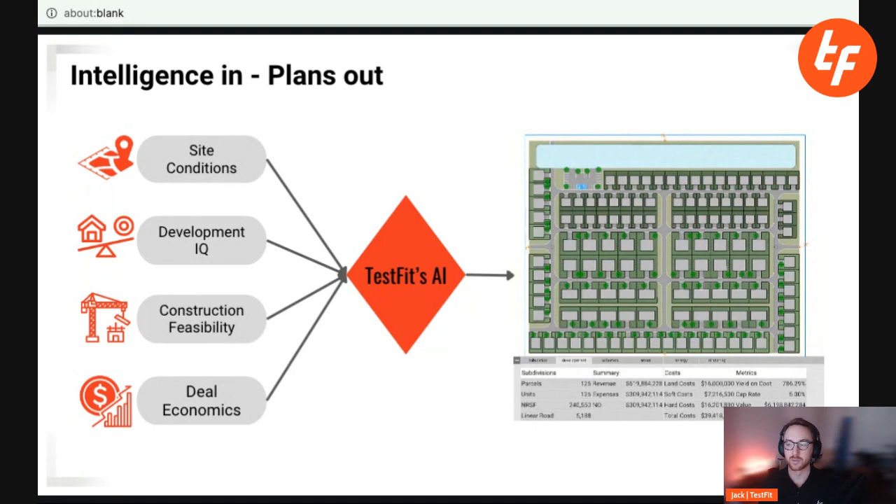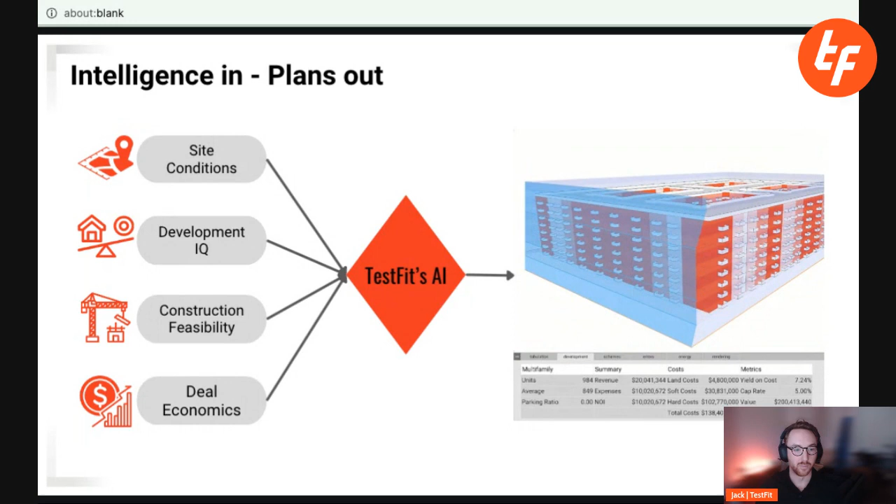So for those of you that are maybe new to TestFit and this is your first time hopping in, welcome. TestFit really is working on the idea of bringing a lot of intelligence into our AI and spitting out plans for you. Whether that's site conditions that we bring in or you bring in by bringing in a background, a development IQ that's built into our algorithms, as well as your understanding of both construction feasibility and what needs to be developed, and then deal economics as well. So all of that combined in TestFit gives you that real-time AI approach to make informed decisions as you're changing a site plan and doing a feasibility study.

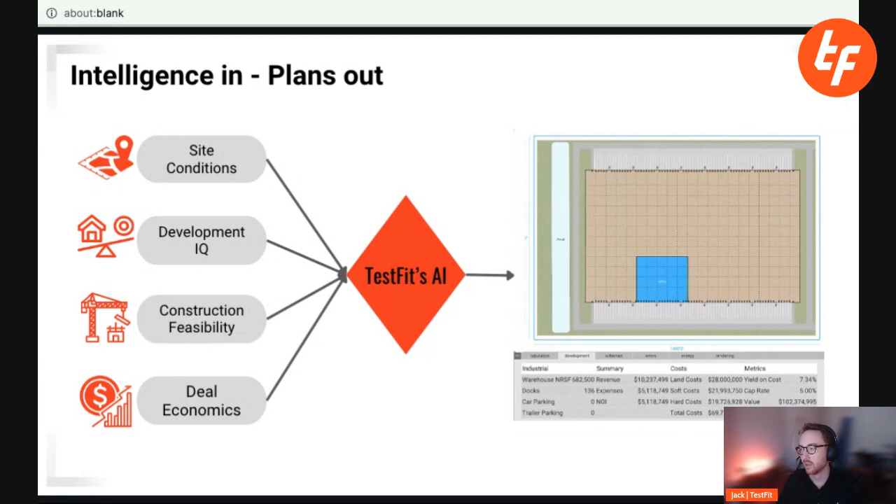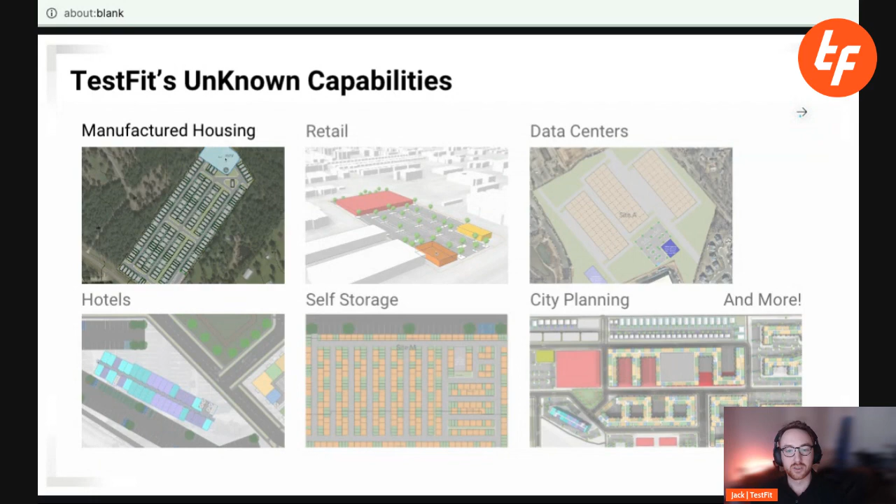Very exciting stuff. But today, manufactured housing, very excited about that, which you can see right there. There's a few assumptions that we're going to build into TestFit's solve today. So always good to have base level conditions, right? We're not working on a gray box, we're not just playing in a playground. So we're going to have site constraints. We've already picked a site, and I'll show you where that is.

A slight grade, we're going to ask TestFit to solve for 5% on-site drainage, 5% of the total area, a 2,000 square foot amenity building, along with 40 parking stalls for both the amenity building and the community.

Lot sizes - there's a lot of ways that we can do this in TestFit. We're going to walk through most of them today. If you have questions as I'm going, feel free to hop in. If you have critiques, also love those as well.

What we're going to work on today is a mix of 3 different types of lots: one to accommodate a single section module, a double section, and a triple, with those dimensions on there - about 75 feet in depth for all of them, and then ranging width.

And then we can adjust the mix that we're looking for too - building sizes that go on each of those. So that single is going to be a 15 by 60, so 900 square foot unit. We're going to look at a 25 by 60 for 1,500 square feet, and a big boy for 40 by 60 at 2,400 square feet.

I'm going to show you there's a couple ways even to solve for the building sizes as well within the lot size. So really fun maneuverable pieces for us to play with today.

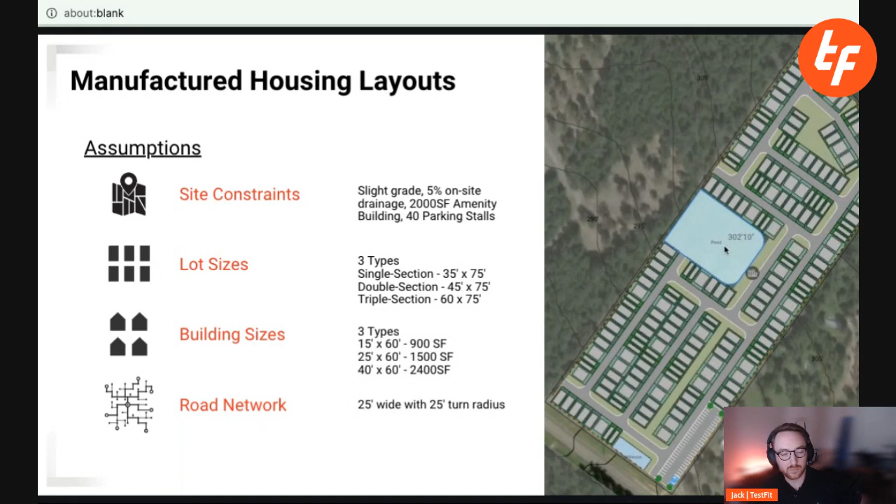So let me go ahead and stop my screen real quick, and I'm just going to switch right over to TestFit.

So for those that are unfamiliar, TestFit is a desktop software, but we're really quick. So everything that you're going to see today is live, not pre-recorded. You're going to see my hands actually moving the software. But we're able to solve really quickly because our engineers are brilliant, and we're able to build a very lightweight software that can integrate a lot of different solution-focused algorithms within it. So let me go ahead and share my screen there.

So what we're going to do here is we already picked a site. So I've already kind of jumped in here. We actually used a recently sold site thanks to some data providers. So we're going to solve this for whoever that owner is - don't know who that is.

What we are able to do within TestFit is put in an exact location, which I did. We can put in an address, you can put it in general location, right? We've got a satellite background, and we can also switch that between road view as well. And then we can add some other data layers to this.

So we can look at US parcel maps, we can bring in elevation data, so you can start to see your contour lines and adjust the increment that you see those at. I think we limit it to 2 feet up to 10. And like I said, this does translate to metric when we do switch into that, but we're working in imperial today.

And so what we're going to do is go ahead and hit this blue flashing button, and that's going to allow us to select a site. We're going to go ahead and add it. You can draw in the site if you want to, trace the lines here, trace in a background image if you want to, or type in metes and bounds if you'd really like.

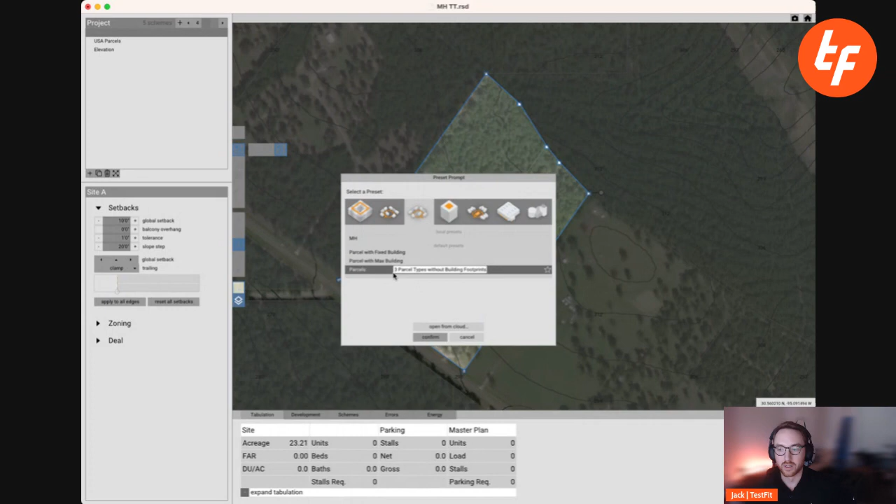And we're actually going to start from scratch. I'm not even going to show anything pre-baked for you guys today. We're just going to start from scratch and show you the full workflow, going ahead and selecting basic parcels.

Sweet, and that's it. But it is really that fast. So we're able to see different parcel sizes already coming in here pre-baked with TestFit. And this is what we call a preset, which basically has a bunch of parameters already saved with it.

TestFit comes pre-shipped with those presets that you just saw, but you can also create your own, so you don't have to use ours. And then it's really that fast to just click and go into your next site and then make tweaks as needed on a site basis.

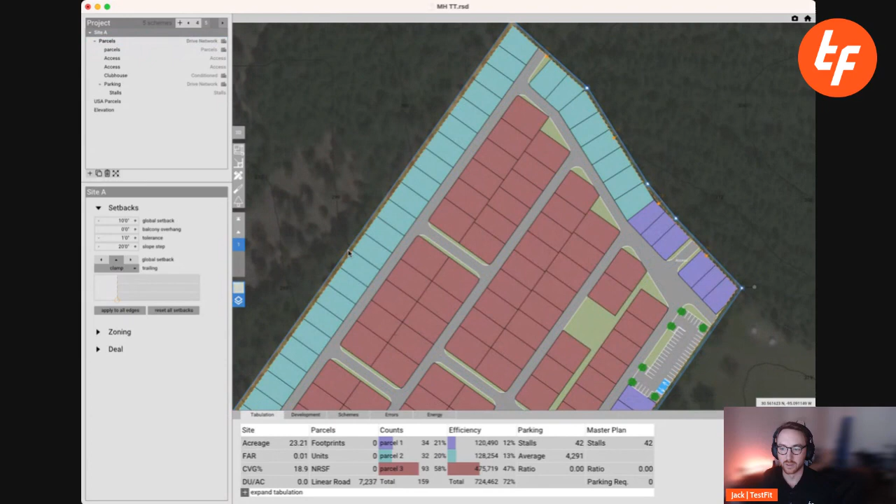We can also come in and actually adjust setbacks too if we wanted to. Really simple in here, just kind of messing around with those. And you can also type in that setback that you want as well.

So all right, the first thing that we want to do is we're actually going to start adjusting the parcels, right? The road network is solving with those parcels in mind, keeping in mind the depth that they're all working with. So up here in our nav tree, we're actually just going to jump to parcels.

So there's a few different tabs in here. We're looking at none right now for our footprint. We're actually just purely looking at the lot size, and that's going to be perfect for us to get started.

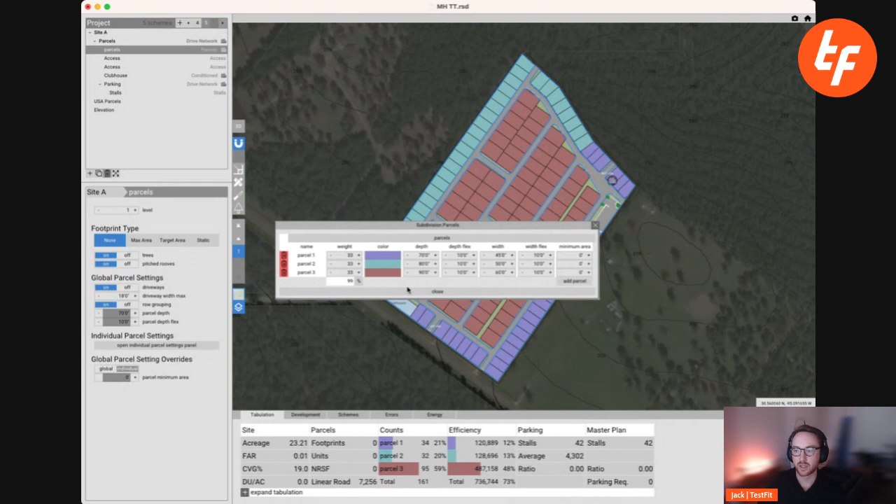After that, let me grab my notes real quick. We're going to look at this individual parcel settings panel. Basically, think about this as your kit of parts approach or your suite of lots that you want to have, and we're going to be able to make adjustments to all of them.

First thing I'm going to do is actually change my colors to a little bit of some pre-baked ones. So I know I wasn't going to do full pre-baked, but we're going to do a couple, just because I like the greens and it makes the plan look a little bit nicer. Great, awesome, so now we've got a few in here.

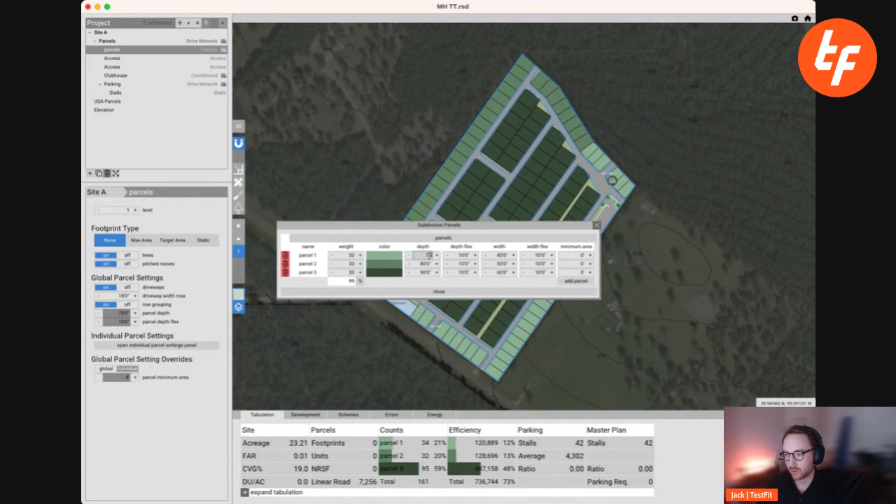We can adjust our weight, and then what we're going to do is adjust our depth and width. So all of these guys are going to be 75 feet in depth. Makes that super simple. And then our widths are going to vary from 35 feet, and call me out if I did this wrong, but I think my notes are correct, 45 feet, and then 60 feet.

And then we have a depth and width flex. We're actually going to leave that just for now, and I'll show you the implication of that in a second. And then we can adjust the weight. Think of the weight as that unit mix, the weight of the percentage of all of your planned units.

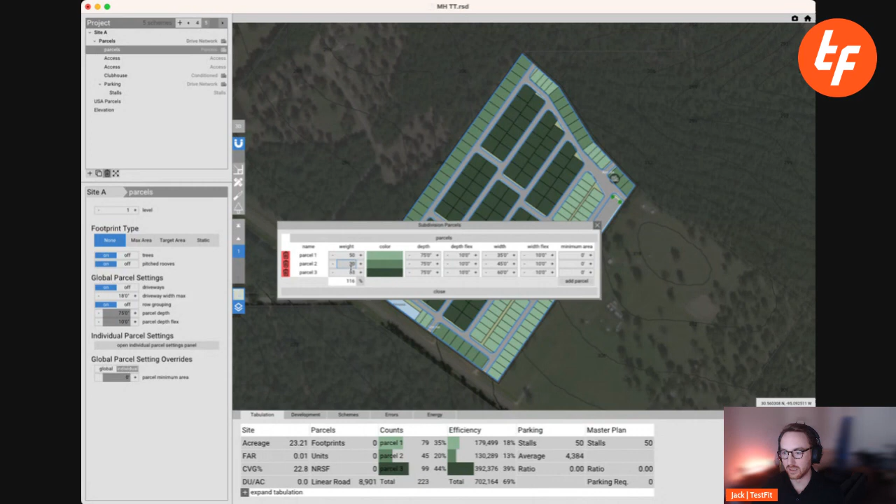So I actually want most of them to be that smaller size. We're going to do maybe 50% these and 20% of the larger ones. So you just saw that implication change in real time. We actually just completely revamped the entire plan, got rid of most of the big ones, and instead put in some of the smaller ones.

Any questions so far? I know this is a lot really quickly, so I just want to make sure we're keeping it open to everyone.

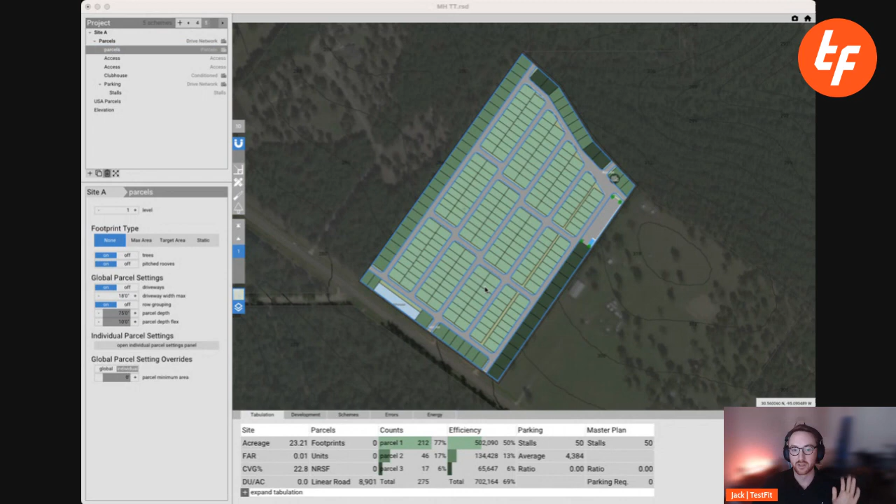So what we're seeing down here below is actually our tabulations page, which is going to show you the total number of parcels, the percent mix that we're actually getting rather than targeting, which is in the settings panel, and then the efficiency as well.

What you're seeing is we're a little bit off right now when it comes to the percentage mix, right? And it's because of something that we call row grouping. So row grouping does exactly what it sounds like.

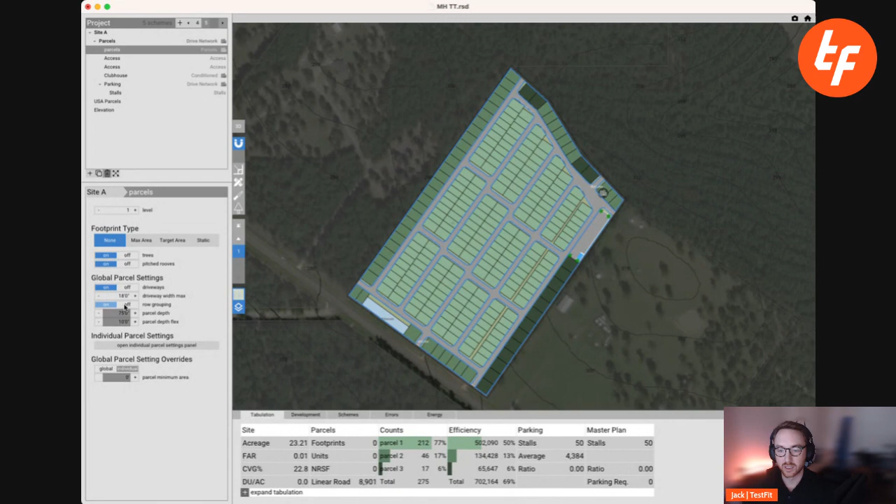It puts all of the same types of parcels together. So that's why you're seeing all of these kind of coming through. So what we're actually going to do is turn off that row grouping for a second. And now you can see there's that actual mix. And we just hit that percentage dead on.

It helps that all of these parcels are the same depth. If you have varying depth, it will still work. It just depends on how much variance there is. We can kind of play with that too. So if I zoom in here, now you can see each block size, if you will, has a varying number of each type in order for us to hit that target amount. So really quickly being able to put that in there as well, and being able to mess with that too.

So this is all great. There's a lot of things that we can start to do from here too. If we came up to our parcels within our nav tree, we can actually change that row axis, just start to cycle between different options. You can see different implications down here. You can even see total number of footprints, all that sort of thing, kind of coming through as well. But what we're going to do within parcels real quick is actually change this to max area.

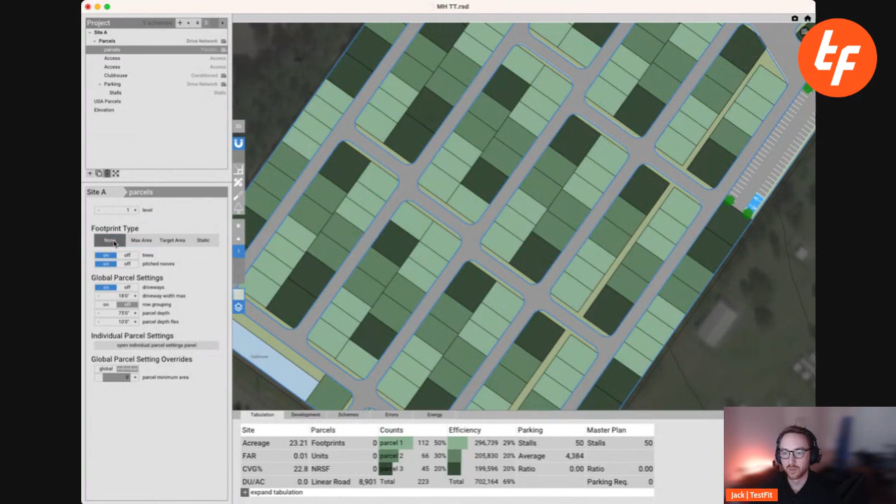Sweet. So what that does is it actually adds a square footage building to it. So let me just actually go back for a second to show you that in 3D in real time. So we're going to go back to none. We're going to go into 3D, just a nice little flat land, nothing really going on, right? Going to go ahead and add the max area. Now we've already got buildings placed in here. Some are 2 stories, some are single. So we've got to make some changes to it, but it really does happen that quickly.

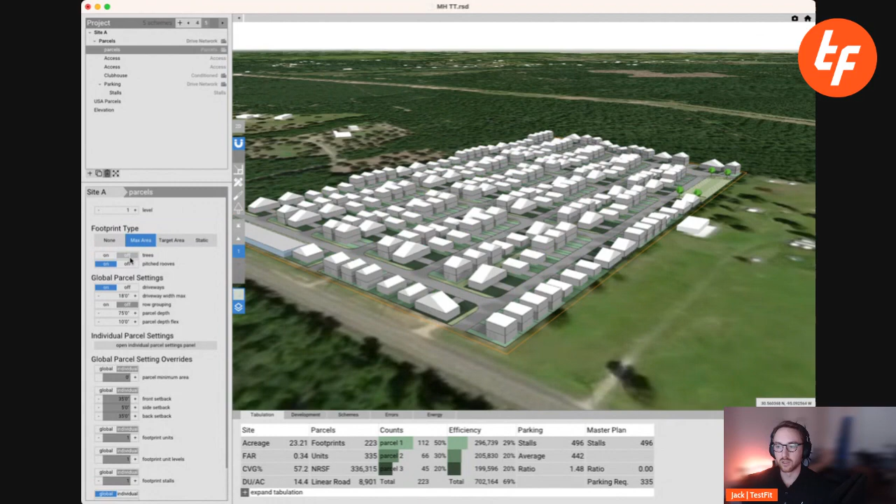And we've got pitched roofs, which we can also turn right off. Depends on how you kind of want to make that happen. We also have trees. You can turn those off too, but I like them. I think they look nice. Cool. So we're going to go in 2D. We've got driveways coming through. We can keep them or leave them. It's up to you. But what we're actually going to do is go back to that parcel settings panel.

So now you can see it's a little bit longer. The reason for that is we're able to now determine more things about this parcel. So the first is number of units in each block, right? We're just going to keep it simple. All of them are 1. And then this one, we're actually going to keep it at 1 level. Now, maybe you want 2 stalls here. Maybe you don't, right? We're kind of designing for that, and I'll show you that in a second. We're going to leave those all at 1 for now, but we can make those changes later.

The driveways are going to be right up front, but I'm going to show you how that's going to work in a second. Because our side setbacks, right, are actually going to be 10 feet. What that allows us to do, because we just have a side that's for both, we can essentially assume that at the end of the day, we're going to offset center those units. Gives a little bit more side yard, allows you to put those driveways in to get that 12 feet, I should say, for a single driveway along the side of the building.

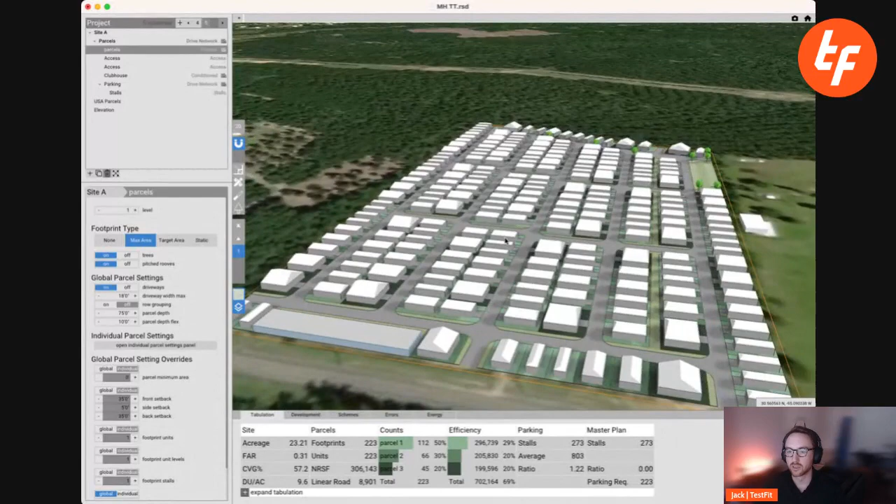And then same thing, setback. We're just going to make them all 5 feet. So I'm going to go ahead and click out of here. Now you can see these actually look more like a single, a double, and a triple, right? So with that in mind, now if we go back to 3D, you can see it's a little bit more uniform coming out in here. You can start to see the buildings coming through, and it allows you to get a better sense of scale for what this development could look like.

Cool. Any questions? Just giving everyone a moment to catch up. If you're doing this at home in real time too, kudos. But if not, it's totally okay. We can always do it live together another time too.

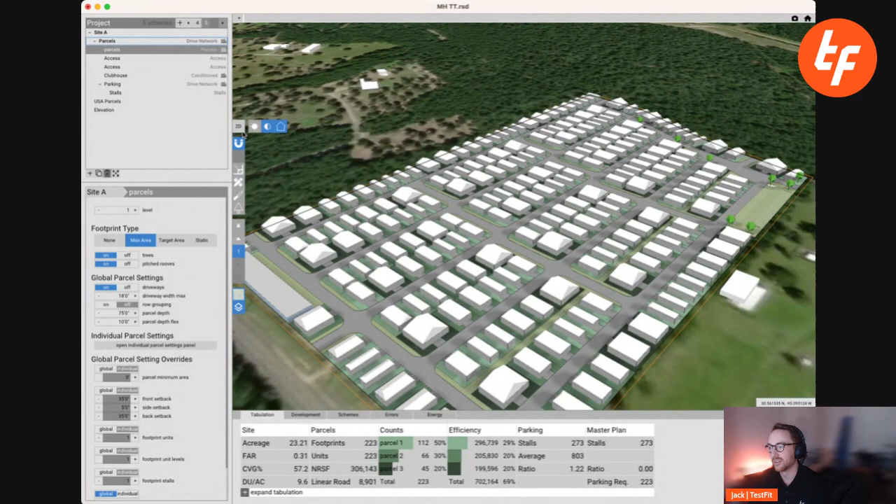Cool. So now that we've got our max area, there's a couple other ways that we can actually solve this. So I can actually turn off the driveways too if we don't really love the way they're looking, and maybe just a distraction for us at the moment. Something that we can do to get the buildings a little bit better is set a target area. So what we just did is set a max area. So that basically said within the confines of our setbacks, fill it with square footage that we can lease, right? Which works because I kind of did the math on the side and we were able to back into it.

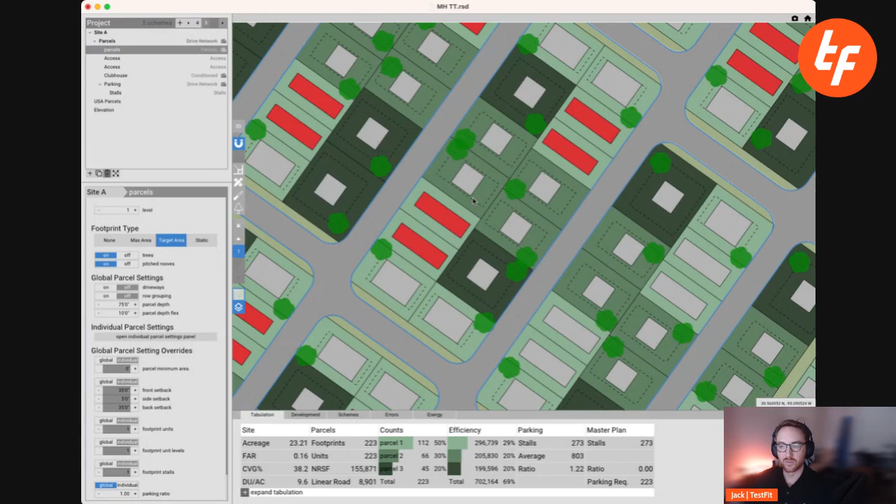Another way to do that is to set a target area. So within here, now you can see a few turned red and a few got real small. And so what that does is within your parcel settings panel, you can actually now set a footprint size as well as your front, side and rear setback.

The reason for this is if you understood the general zoning that was happening within your area and you're like, okay, within these parcels, I know I have to have these setbacks, but I don't want a maximum area. Maybe I want some variability in my land or my parcels, and I want to see what's the target square footage. So let's go back to the 900 square feet real quick. And we're just going to say 900 square feet here. Oops. 900 square feet.

I have a fun fact about James Bond if anyone wants to hear it later, but let me know.

So 900 square feet, we're going to do 1,500, and we also are going to do 2,400. And so what you're seeing is some variability here. So we're actually not able to get to those based on the depth and the width flex. So this is something we talked about a little bit earlier. So basically what that allows us to do is this width flex right here. We're able to say, okay, we want 35 feet, but within 10 feet north or south of that number, we're willing to accept.

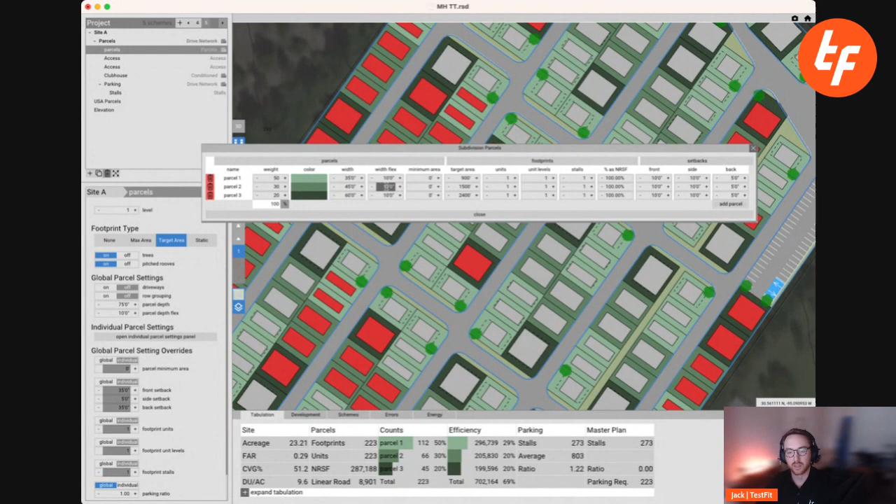Now, let's check these out because they're going to be the smallest ones. If I say, I don't want any flex here, we can start to see, maybe we need a little bit better here. The other part of that is actually going to be our parcel depth flex at the same time. So we're allowing it to, again, shrink 10 feet north or south of that 75. So if I go ahead and say, nope, I don't want that, now you can start to see all of them are getting to that exact solve because we want no flexibility. We want this more rigid, and we want exactly what we're asking TestFit for.

The reason to use a width flex or a depth flex is if you have a very non-rectilinear, kind of funkier site, and you're willing to have some of that flexibility in order to get more units on. Every site might not be perfect in that you're going to have to play with your layout at the end of the day. Like maybe it has to be on a little bit of an angle because you have a tree in the way or whatever it is, right? Or a sight line that doesn't exactly work. So we give you that flexibility.

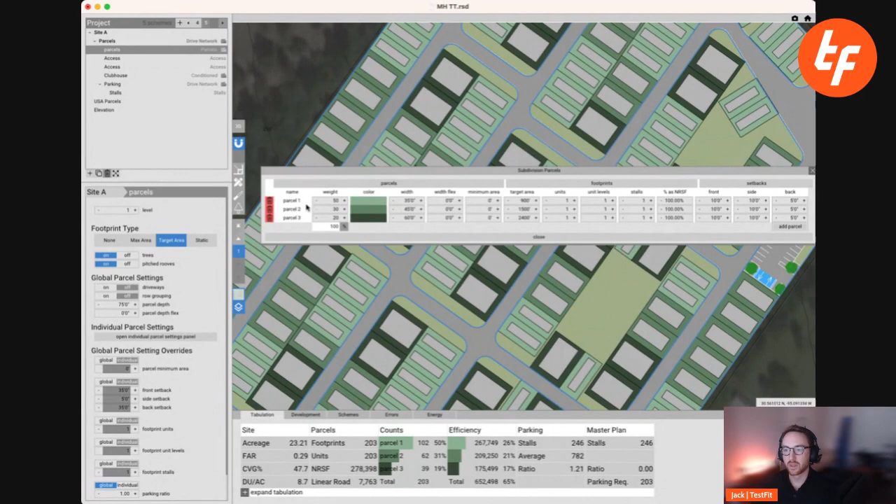Because we're mostly rectilinear on this site, I'm just going to go ahead and get rid of all of those. And that's going to give us more perfect rectangles, if you will. Cool. So now we've got our layouts in. We have a little bit of extra area that we don't love because we want that efficiency, right? If you want the parks, that's great too.

I would like the efficiency. So we have 203 footprints. So we're going to go back up to our parcels and really quickly just change that row axis. 200 here. Now we've got 200 there. We've got 203 again. They're just on an angle.

I like that because I want 3 more, but I'd rather have a better layout. I've got my clubhouse rather than maybe more rectilinear, and there are only 200. So now I get to have 3 more, which gives me a little bit more dollars in the pocket on the development side, but I get to have this better layout.

When we were talking about that clubhouse too, we wanted that to be a certain size. So I'm just going to go ahead and select that. It's blue right now. We can always change that. I'm actually going to put it as like a red or an orange, just because that stands out a little bit more and doesn't look like a pond. In here, we can say what's our target base level area. I'm just going to go ahead and put in 2,500 just for a size.

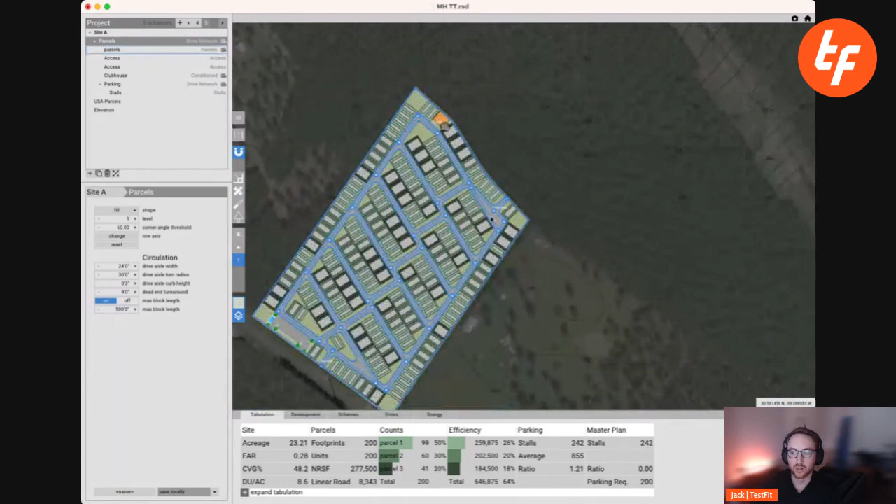And so just to show you what that looks like if we were to remove that, we call that the corner angle threshold. So basically think about the angle that the units or the road network is coming at, and what's the angle threshold where we want to extend that roadway out. So what I'm going to do is go ahead and toss this down to 60. And now you can see we cut that out, so there's no more single loaded, but we also lost 4 or 5 units because we now have unused space in those corners. So it is nice to have.

It does look like an entrance, but we don't deem them as entrances. What we actually have is access entrances. So you can move these around however you want. We have one over here which actually landed perfectly, but it's always very easy to move those. So maybe we want to line that up with that road, and there you go.

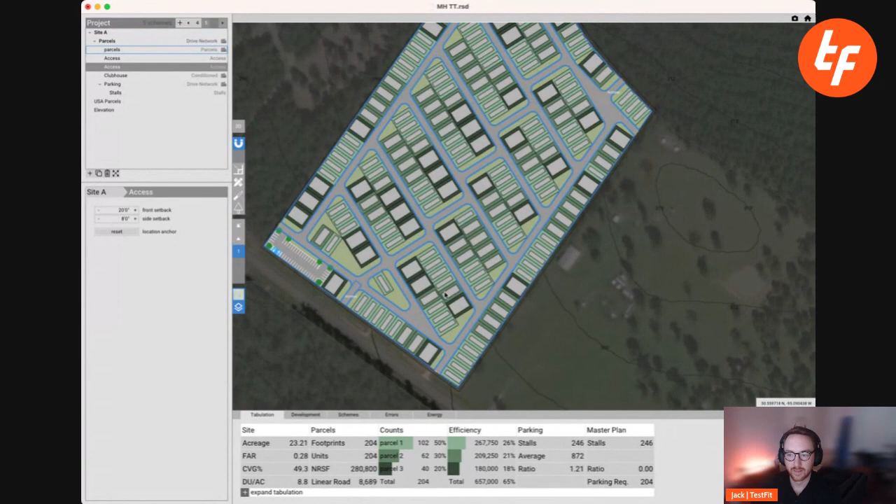Cool. So when we're working with all of these site plans, or with these parcels, I should say, there's another way to go about this. And that's from a static perspective. So what I'm going to do is go to schemes real quick and just go ahead and copy that. You can see I did a few test ones earlier today just to make sure I was ready for all of you. But what we're going to do is go ahead and hit that plus button.

Schemes in TestFit are great. Basically, it allows you to copy over and save your work within the same file. So now all I did is change it. If I were to just make one simple change to my row axis, great. If I go back to scheme 5, the old one's still there. Didn't lose any of my work, but now I can do more testing. So let's go back to our parcels.

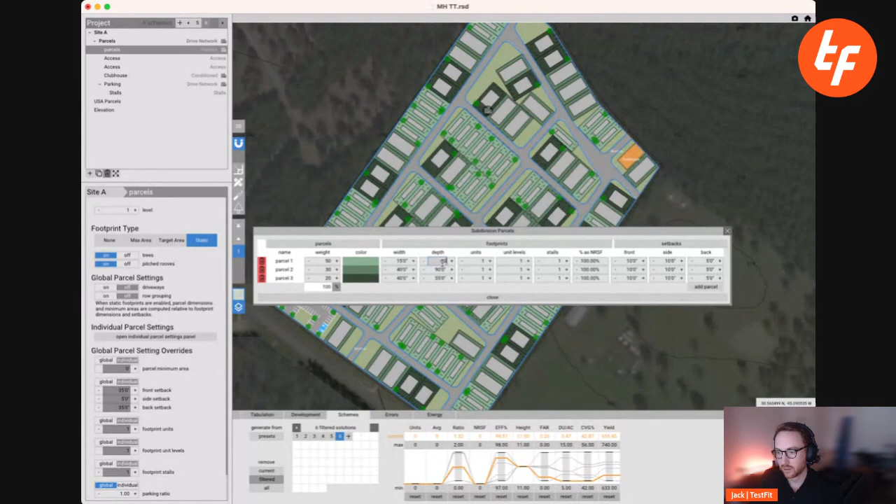And within static, what we're going to do is go back into our settings. And now we can actually say, how big do we want the physical building? So especially for manufactured housing, we know our modules and we want to solve around them, right? So what I'm going to do is say we're going to do 15 by 60. You're going to see it all jump around behind me for a second. We're going to do 25 by 60, and we're going to do 40 by 60.

I just got a question. Chris, looks like you can grab any of the elements and adjust from there. Basically, yes, right? So more of a parameter-based approach, so you have all the parameters on the left, but yes, live in Canvas, grab something, move it around, it's just going to go ahead and dynamically resolve for you. We're going to see that here in just a second when we add a pond as well, so you can see what that looks like.

But great question, absolutely. And then same thing, so front, side, and rear setbacks are all set. We now have our units set up, so we're good to go there. And the setbacks, instead of looking at the site and coming inward, we're looking at the static building and going outward. Makes it a little bit easier for manufactured housing. Wanted to show it to you guys last because this is super useful. But it's also fun to look at the other ways of solving too. But this is now, we're basically, quote, perfect on our building layouts. And then we can just solve the resulting lot size around them.

I'm going to move my clubhouse back. He just kind of moved around for us, so makes that really easy. And let's go back to our tabulation. We're at 194. Cool. So we can go ahead and change that however we want. Maybe we want to actually look at something like this, 198. I'm good at that because I like the layout. Makes that super simple. And there you go.

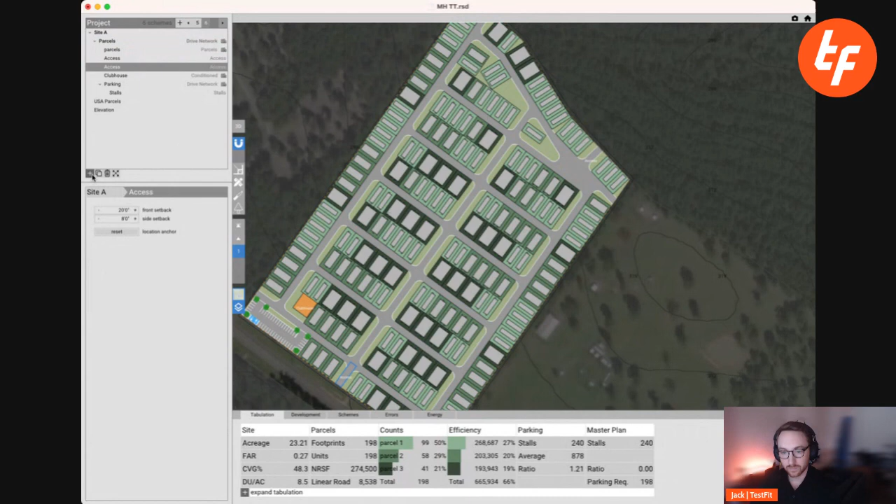Cool. So yeah, Chris, let's go ahead, kind of jump in and see like the full element moving. So we wanted to add a pond to this as well, right? So we're not even done yet. We're going to go back to our site. And within our site, think about that hierarchy. We kind of want things solving below it and then different pieces kind of coming in to solve above. So something that has to solve and something that the lots have to solve around is going to be an easement, right? If we had one, we don't want it on this site. We can fake one here in a second. But the big one is retention ponds.

So I'm just going to go ahead and select add. We're going to go ahead and do pond. And there you go. Now we've got a pond. And so we're doing a rectangular fill right now. We can also freeform that as well. So if you wanted it in a certain area, freeform does get rid of this next piece, which is going to be your percent of an area. So there's kind of fun ways to, I wouldn't say fake that, but we can kind of make it work by creating, let's just say this is actually going to be 5% like we talked about. We can leave that whole pond there, right, if we want to.

We know our contour lines, the low point's kind of to the left. So what I'm going to do is grab this and drag it over. You're going to see some funky solves as we're making those changes. But as I bring that down and make it work for kind of just a smaller pond, now you can see TestFit's dynamically resolving for us. Putting that in this corner actually works. And now we've gotten to a point where the pond makes sense because it's on the low point of the site, but it's still 5% of the site.

And we have our clubhouse right around there. We've got our buildings remapping to a brand new road network that does work around that as well. And our entrances and everything still work too. So we're at 190. And again, we can go in and say, maybe I don't love this row axis. Let's kind of cycle through. That one gets 194. I wouldn't draw that personally from scratch because I would say that's too much extra space. But the way that this is solving makes it really simple too, to see that full number. 181, right? 188, 198 makes that great.

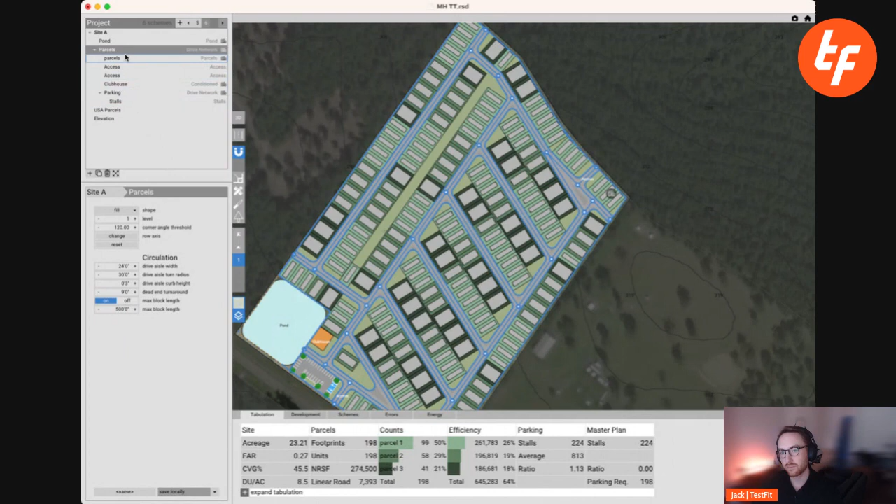So something to think about too that I didn't mention earlier is row length. We're just about on time, so I'm going to make this quick. When we come up here to our parcels and we're looking at our road network, we're going to increase this to 25 feet. We're going to decrease our turn radius to 25 feet. So now you can see we've now met all of our parameters, but something I want to play with is our max block length. So you see how this block is pretty long, right?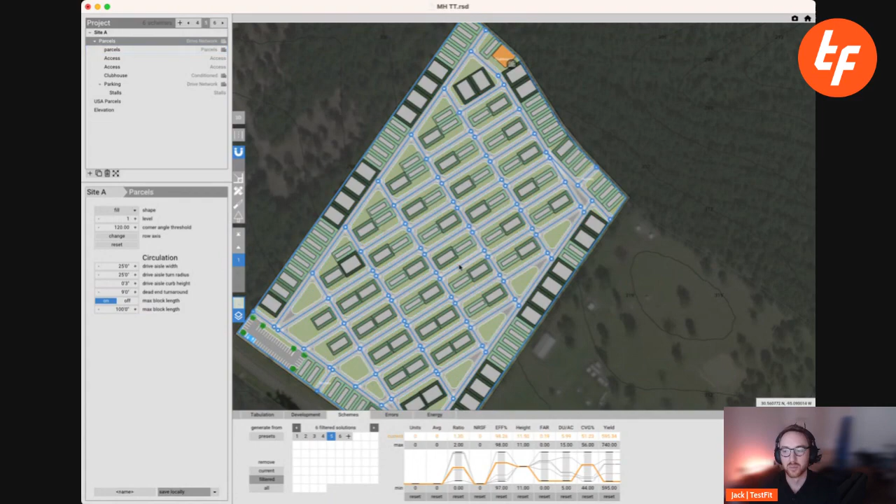And let's just go back for a second to our other option without the pond, because these have short blocks. So coming back, I'm just going to do the same thing, 25 feet, and then same thing, 25 feet turn radius. So 500 feet block length. If I wanted to, I'm just going to do 100 feet just to show you. And now we've got really tiny blocks. Maybe we're living in Portland or something like that, right? So you can see how we can get dynamic there.

We can also then increase this by 10. Maybe I want 1,000 feet. And now we just have really long blocks just to max out that density, because every time you draw a road, you're giving up square footage from the roadway to your lots. So being able to do that, now we're at 220 units within this one. So that makes that really simple too.

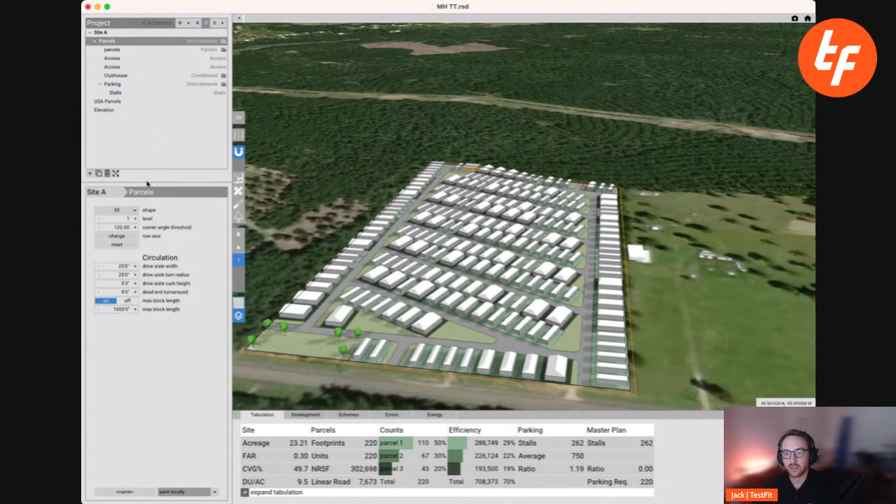And I love doing this, going in 3D and changing the orientation. It's just fun to see that dynamically resolve. It also shows you how that mix is working in real time. Got some bigger boys down here, and then up here, the mix changes in order to make sure we hit that mix as best we can.

Awesome. So that's TestFit with manufactured housing. There's a lot more that we can dive into, getting into the nitty gritty of driveways, more unique units, that sort of thing, more dynamic pieces. But for now, this gets you off and running and can get you a plan out the door in what took us 15, 20 minutes here.

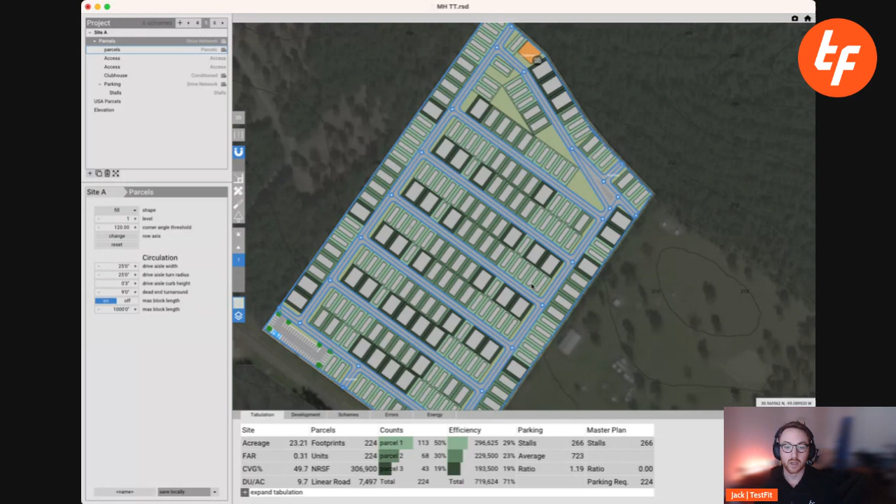We got one long question. Let me go ahead and read this real quick. Great question. So basically, the question is around alignment. So we're trying to align elements to a certain piece. The way it works right now is we align to our parcel lines. So you can see that very simply on the left and the top left, right? We've got a parcel line coming here, parcel line coming there, and we start off with units and then road, right? Up here where we have the angles, you can see that coming through as well.

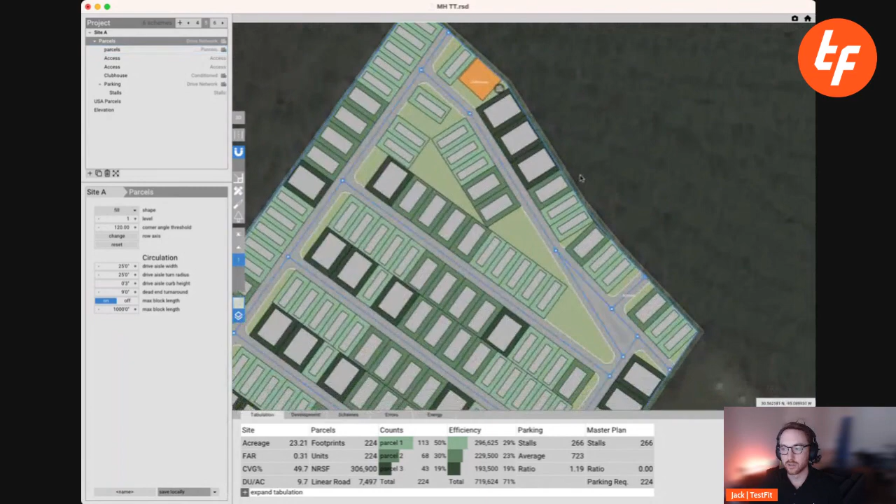We have a little bit of a funky situation here that we can always adjust, just to make that easy. But you can always come in and draw in your own roads too. So if I came in and click this road network, I can just go ahead, draw my own, and TestFit is going to dynamically resolve around you. So that makes that really simple. First solve with TestFit, next solve with all of your intelligence.